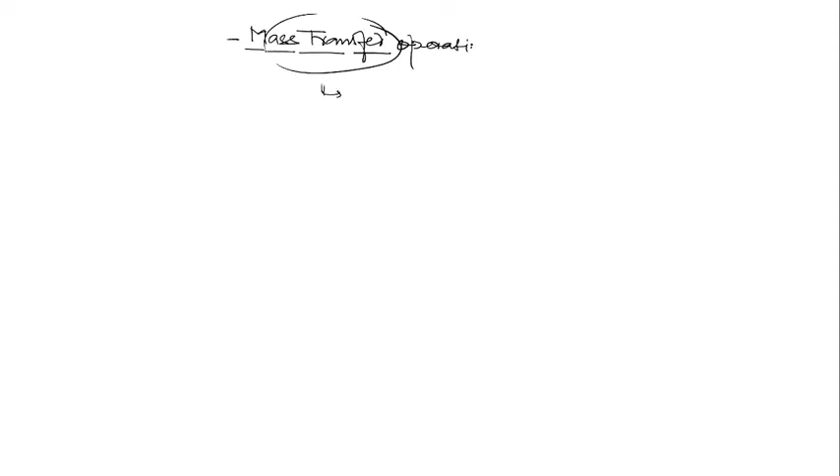Is this clear, Pratisha? So basically mass transfer operation is a unit operation. Mass transfer operation is a unit operation. So again, listen very carefully.

If you are talking about change in composition in a solution or mixture, there are various unit operations in chemical engineering applications which involve change in composition in solution or mixture, which does not involve any chemical reaction. That means without chemical reaction, or in the absence of chemical reaction, there is some mixture or solution which involves the change in composition.

If you are talking about the change in composition in a mixture that is based purely and entirely on mechanical processes, we deal with that in mechanical operations. In mechanical operations, we change the concentration of solution by removing the solute, by removing suspended solids, using mechanical forces like centrifugal forces, gravitational forces, and other forces.

But if we are talking about change in composition, if we are doing any operation on a solution to carry out the change in concentration without chemical reaction, that's called mass transfer operation. Is that very clear?

And what is the importance of this mass transfer operation? What is the need for change in composition of solution? Because there are rarely any chemical processes that do not require a preliminary purification of raw material or final separation of the products from the byproducts, and for these, mass transfer operations are usually used. That means they are very rare — there are very rare chemical processes that do not require preliminary purification of raw material.

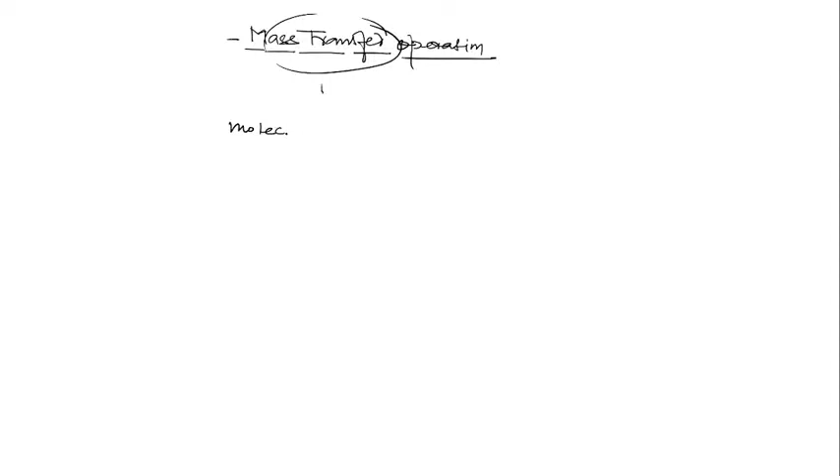Molecular diffusion. Still I have not told you the definition of mass transfer operation. I told you only what mass transfer is, but I have not defined mass transfer operation. Mass transfer operation is any operation which involves the separation of components from a solution without involving any chemical reaction. So through mass transfer operation we can separate the components from solutions. But what mass transfer operation actually is, I have still not defined.

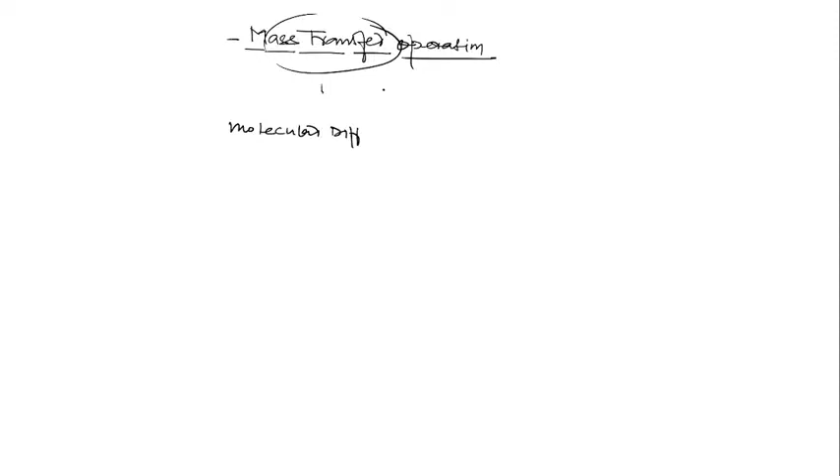So let us see here. As I told you, I also told you what is the importance of mass transfer operation. Now I am going to define molecular diffusion. So what is molecular diffusion first? Molecular diffusion is nothing, it is...

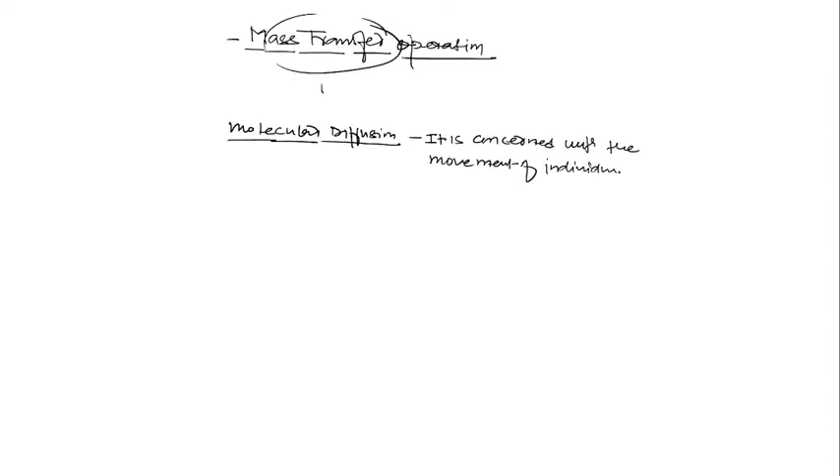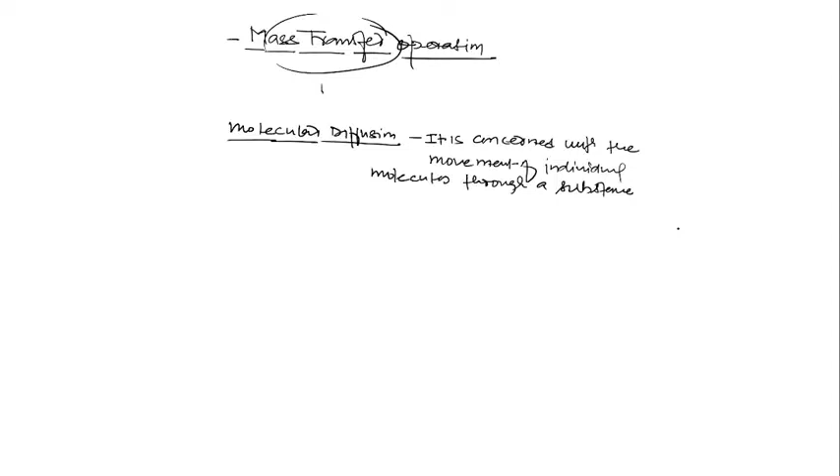...concerned with the movement of individual molecules through a substance, movement of individual molecules through a substance by virtue of their thermal energy. Clear?

And from the kinetic theory of gases we can visualize what occurs in molecular diffusion. You might have heard about Brownian motion in chemistry. The same phenomena we can also explain with the concept of kinetic theory. The kinetic theory of gases provides a method of visualizing what occurs in diffusion. Through kinetic theory, a molecule is imagined. Just think of your room, the air is there, and there are molecules of oxygen and nitrogen.

From kinetic theory you can imagine that the molecules of the species travel in a straight line with a uniform velocity until it collides with another molecule. Once it collides with another molecule, its velocity changes both in magnitude and direction.

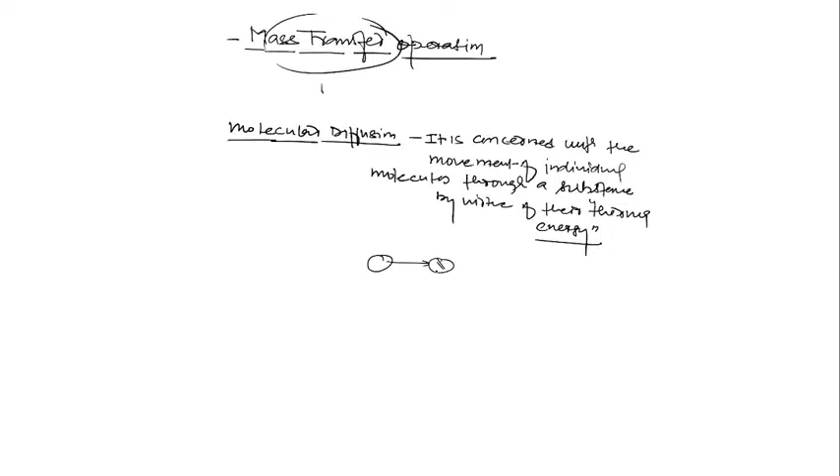So the molecules travel a highly zigzag path, because once a molecule moves in a straight line, it will collide with other molecules, and once it collides, it changes its velocity, both the vector quantity changes. So the velocity changes in both magnitude and direction. They may change direction. Let's say this is a single molecule I'm talking about — it changes the magnitude of velocity and also direction. Again it travels, again it collides with another molecule, and again its magnitude and direction change, and so on.

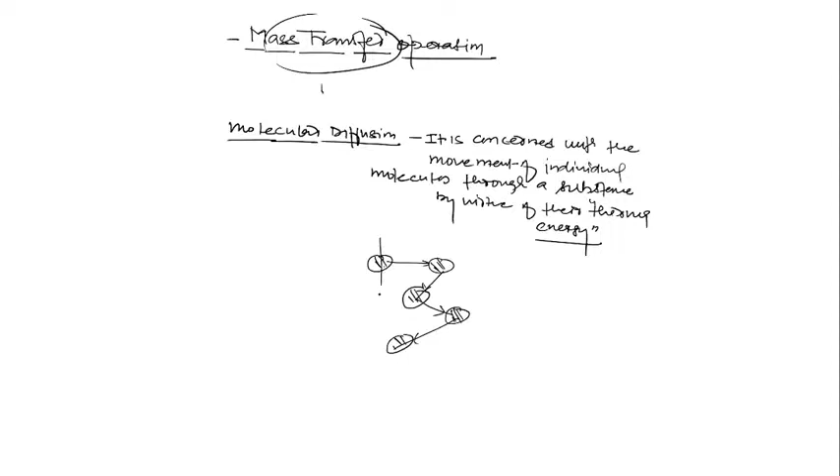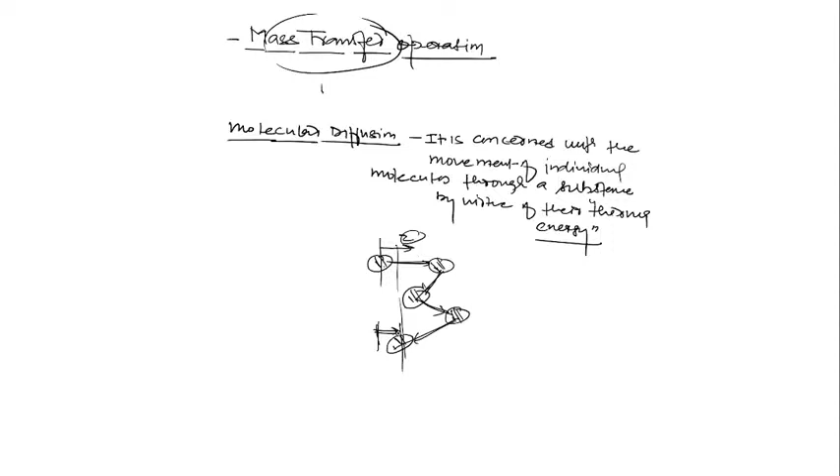So what happens here? There is a highly zigzag path — the molecules travel a highly zigzag path, but the net distance in one direction is very small. If I'm talking about movement in the z direction, the net movement of these particles in the z direction is a very small fraction of the actual movement. The particles actually move through many segments, but the net movement in any given direction is only this much distance, because molecules ultimately move from this point to this point. So this is the only net movement there is.

So the net movement or net distance in any one direction which it moves in a given time, that's called the rate of diffusion. What is rate of diffusion? Rate of diffusion is simply the distance traveled by the molecules in a given time — that's called the rate.

So rate of diffusion is only a small fraction, or you can say the net distance traveled by the molecule in a given direction is a small fraction of the length of its actual path, and for this reason the diffusion rate is very slow, or molecular diffusion is a very slow process.

Although we can expect to increase the rate of molecular diffusion by increasing the temperature and decreasing the pressure. Increasing temperature will increase the kinetic energy of molecules, and decreasing the pressure will increase the mean free path. As mean free path increases, and pressure decreases, the number of collisions will decrease.

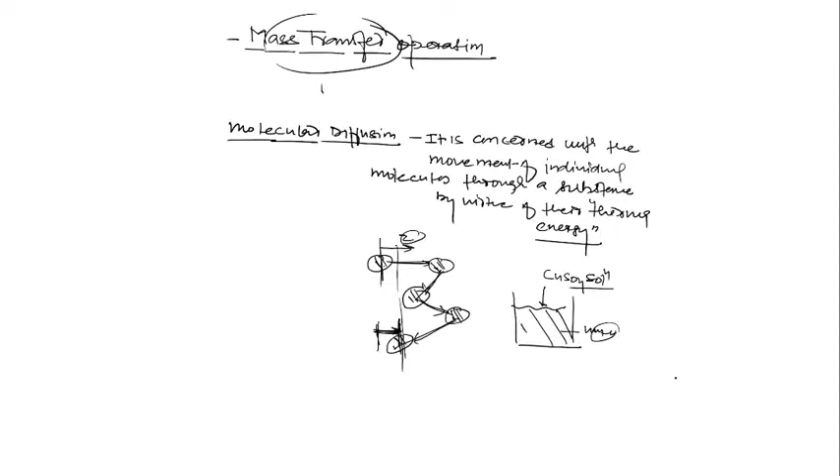By kinetic theory of gases, a molecule is imagined to travel in a straight line at uniform velocity until it collides with another molecule, whereupon its velocity changes both in magnitude and direction.

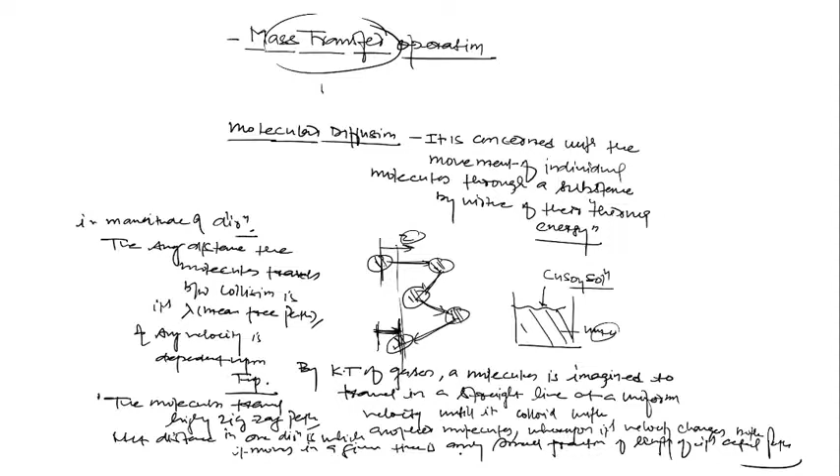So why is it slow? Because the molecule is imagined to travel in a straight line, it collides with other molecules, and upon collision it changes its magnitude and direction, following a highly zigzag path. That's why the net movement in a given direction is only a small fraction of its actual movement, and that's why molecular diffusion is a very slow process.

Next point, although we can expect it to increase with decreasing pressure and increasing temperature, I haven't told you anything about mass transfer yet. I just told you about diffusion. Diffusion is simply the transport of species by virtue of its thermal energy.

It is concerned with the movement of individual molecules through a substance by virtue of thermal energy. That's called molecular diffusion. And since molecular diffusion is a slow process, any mass transfer associated with molecular diffusion will also be a very slow process. Today I will discuss only molecular diffusion, and how it relates to mass transfer I will discuss in the upcoming section.

But how can you increase molecular diffusion? By increasing temperature and lowering the pressure. Increasing temperature will increase the molecular velocity and also kinetic energy.

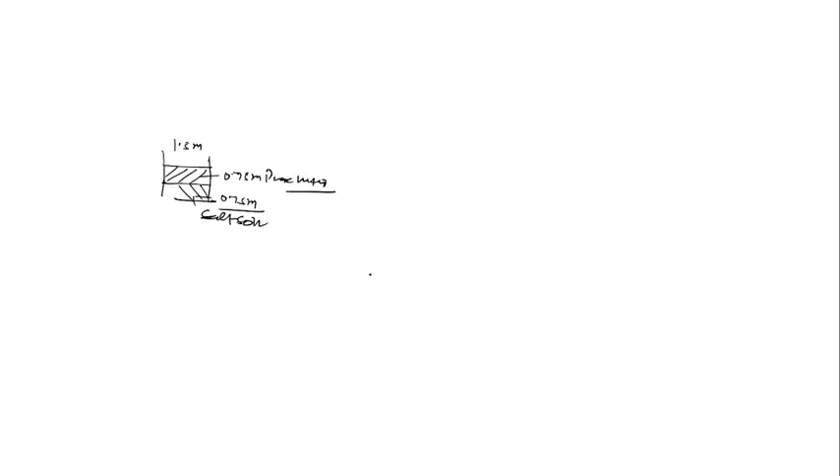So one half means what? Salt will get permeated because of the concentration, as in a natural process, since molecules are moving randomly, and that's called diffusion. So due to molecular diffusion, the molecules of water and molecules of salt are going to move here and there, and if the contents of the tank are left completely undisturbed, then salt by molecular diffusion will completely permeate the liquid and ultimately come everywhere to one half of its concentration in the original brine.

One half, because whatever concentration was there becomes half, because obviously the volume becomes twice. As the volume becomes twice, the concentration becomes half. Yes or no?

Because whatever salt is there, let's say 0.75 meter depth and some area, it means some volume is there, and an equal volume of water we have placed over this pure salt solution gently without any disturbance. Then obviously, due to molecular diffusion, or due to transport of molecules called molecular diffusion, the concentration of the salt becomes half of its original solution.

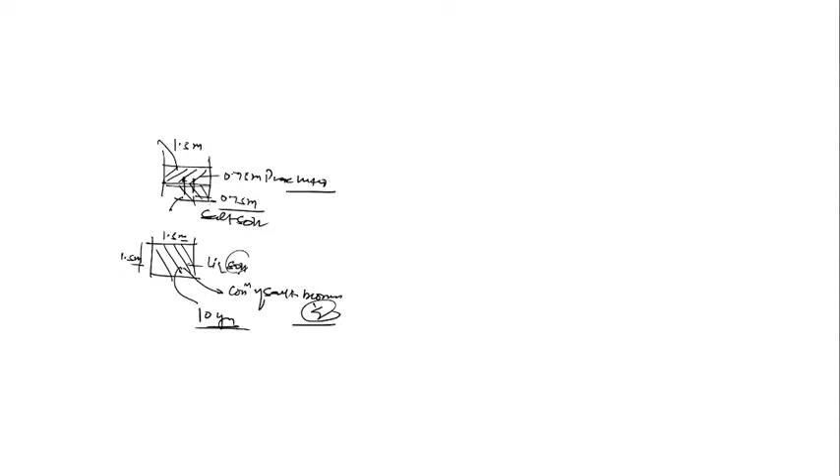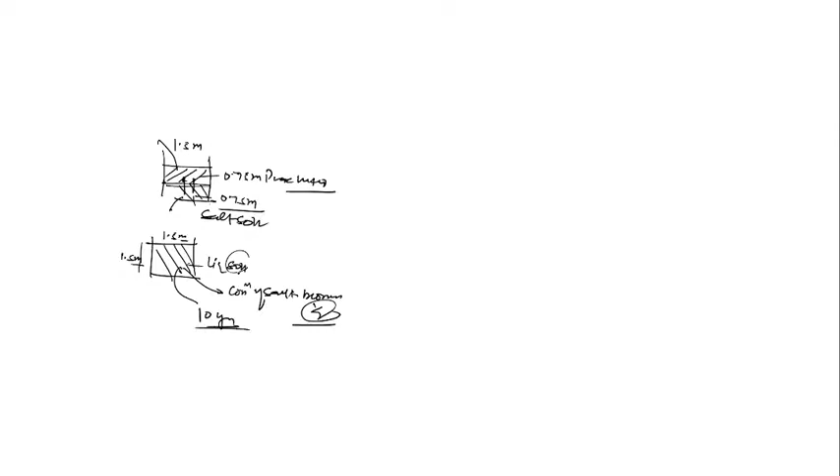Clear? So two types of mass transfer we have seen. What is mass transfer? When diffusion of species takes place from the region of higher concentration to lower concentration, that's called mass transfer. Clear? So first I told you molecular diffusion, and based on molecular diffusion, two types of mass transfer exist. One is called molecular mass transfer, other is called convective mass transfer.

So first of all listen to what I told you. One is molecular diffusion, and other is eddy or turbulent diffusion. Molecular diffusion is concerned with the movement of individual molecules through a substance by virtue of its thermal energy.

And if this random motion, this molecular diffusion, is taking place in the presence of a concentration gradient, that's called mass transfer. Is this clear? In simple terms, when the random motion of molecules takes place in presence of a concentration gradient, that's called molecular mass transfer. Clear? A simple mass transfer is there.

One is called molecular mass transfer, other is called convective mass transfer. Molecular mass transfer is primarily due to molecular diffusion. Convective mass transfer is primarily due to eddy or turbulent diffusion. Clear?

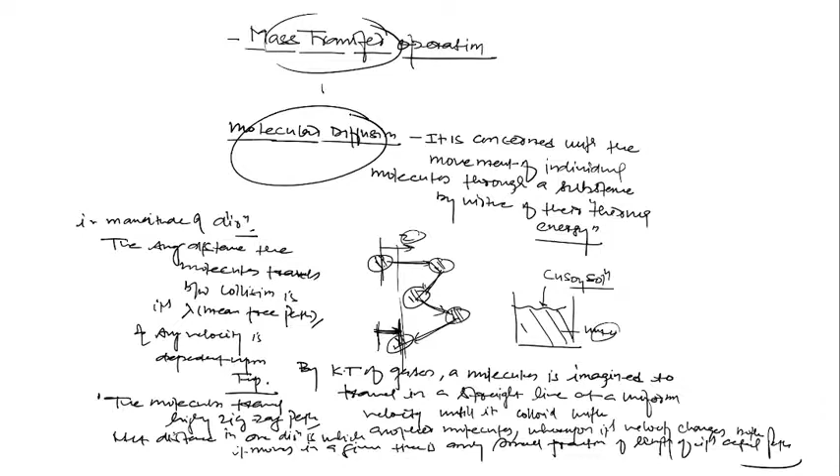So first, I told you it is molecular diffusion. Now what is mass transfer? The mass transfer is the molecular diffusion in presence of concentration gradient, or you can say diffusion, in presence of concentration gradient. It is diffusion.

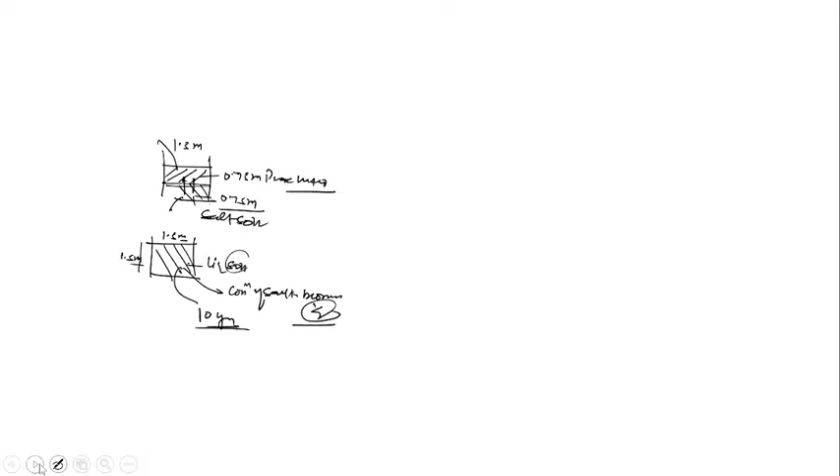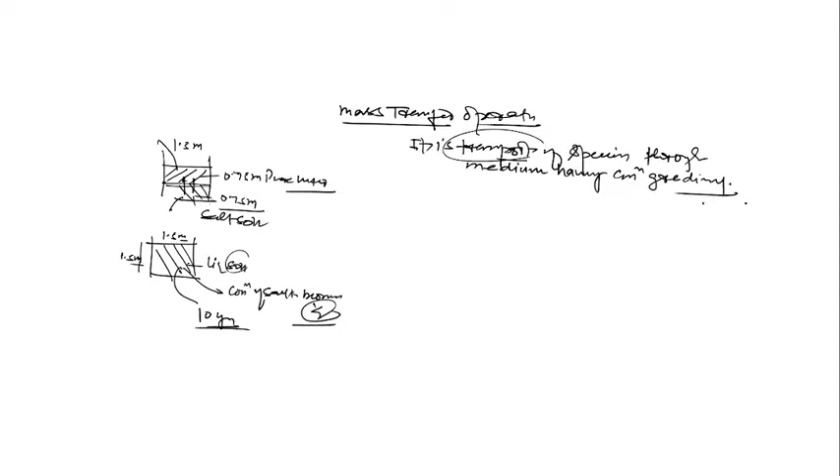Now I am going to define mass transfer operation. It is transport of species or component through a medium having concentration gradient, that is called mass transfer operation. So you can also say diffusion of species. Transport is nothing but diffusion, and diffusion is of two types: one is molecular diffusion, other is eddy diffusion. That's why I told you, commonly, it is transport of a species through a medium having concentration gradient, that's called mass transfer operation.

Types of mass transfer. Depending upon mechanism of transport, there are two types of mass transfer. One is molecular mass transfer, and second is convective mass transfer.

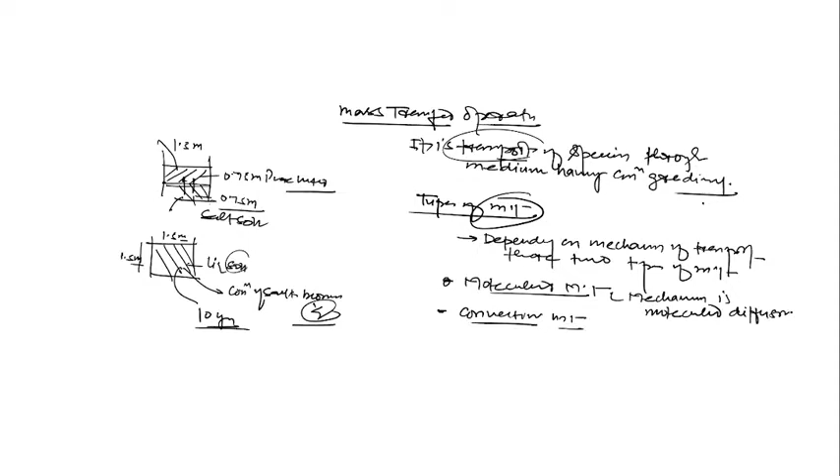In molecular mass transfer, the mechanism is molecular diffusion. You can write about this point: mechanism is molecular diffusion. It prevails in stagnant fluid medium, and also in fluid which are moving only in laminar flow. Clear? This is what molecular mass transfer is.

In convective mass transfer, the mechanism is eddy diffusion or turbulent diffusion. And obviously molecular mass transfer is very slow because its mechanism is molecular diffusion, while convective mass transfer is very fast because its mechanism is eddy transport or turbulent diffusion. Is this clear?

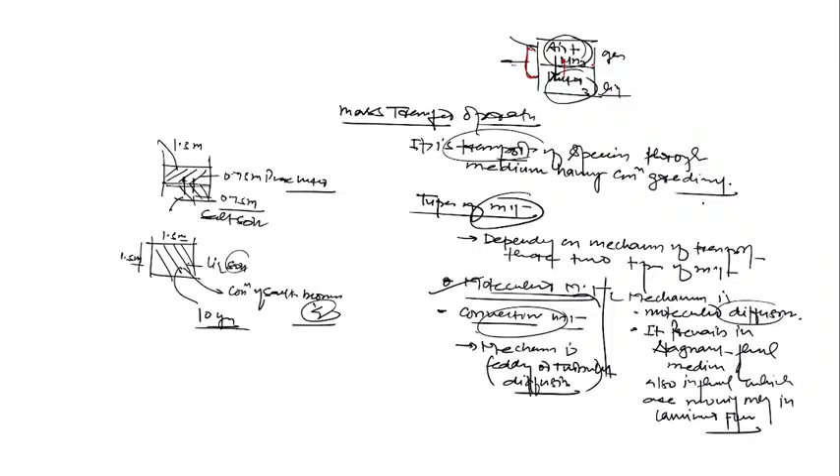At the end of the operation, when the system reaches equilibrium, what happens? Concentration of any constituent, either air or ammonia, is same throughout a phase. Same throughout a phase means it is not equal in all phases, but it is uniform. Whatever concentration of ammonia, it is same throughout the gas phase, and whatever concentration of ammonia in the liquid, that will be uniform throughout the liquid.

So what I'm saying to you: ammonia concentration will be uniform throughout the liquid, and uniform at a different value throughout the gas. Clear? And there is no further change in concentration because the system reached equilibrium.

So let's say I'm here, this is y, this is x. Y is the mole fraction or composition of ammonia in the gas phase. X is the composition of ammonia in the liquid phase. This composition of ammonia in gas and in liquid is not going to be further altered because the system reaches equilibrium, and that's called the equilibrium composition of ammonia in gas and liquid. Why equilibrium? Because they are not going to further change, since this is the composition at the condition of equilibrium.

It means if this composition, let's say y is 0.3 and x is 0.2 - I told you these are not necessarily equal, they are different. It means concentration of ammonia in the gas phase is uniform, concentration of ammonia in the liquid phase is uniform, but they are different in values. Here it's 0.2, here it's 0.3.

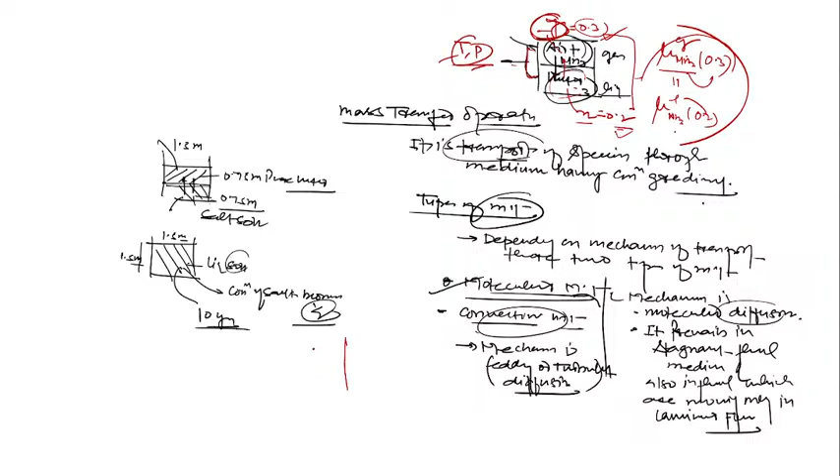At the same time, in a multiple phase system, we customarily deal with the diffusional process in each phase separately. Customary means it's a tradition. So if you're talking about mass transfer between multiple phases, like gas phase to liquid phase, then we are not talking about mass transfer for the whole system. We are talking about mass transfer in the individual gas phase and individual liquid phase. And in the individual gas phase, the driving force is concentration difference.

So if you're talking about mass transfer in multiple phases, then it is customary to define the rate of mass transfer in individual phases, and in individual phases we can write the driving force as a concentration difference because it is easy to visualize.

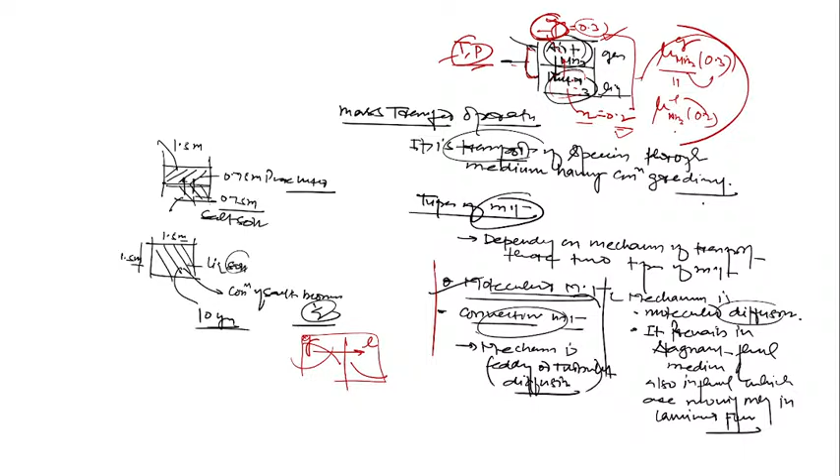So today I told you about two different types of mass transfer. Now as far as driving force is concerned, through this example we can define that in this case, driving force for mass transfer - so through this example, when you allow multiple phases to be in contact...

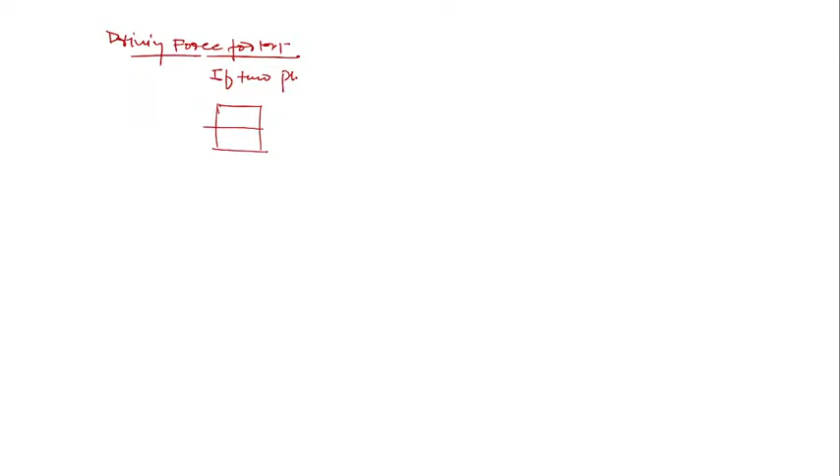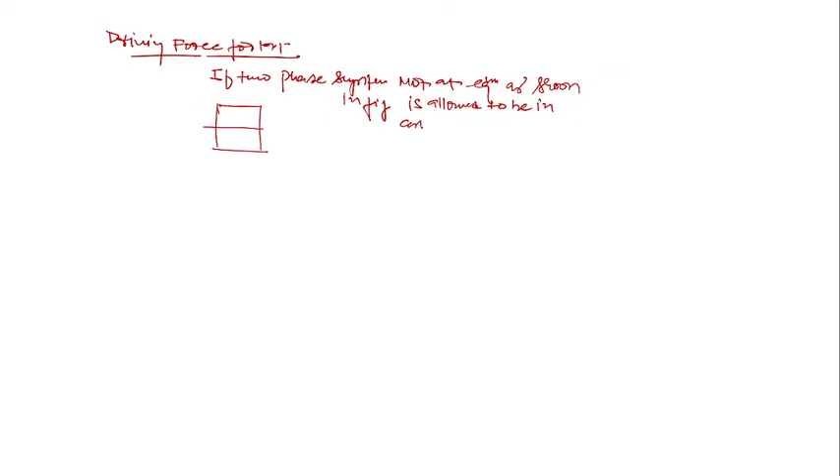If the two-phase system is not at equilibrium, as shown in the figure, when allowed into contact, spontaneous alteration through molecular diffusion occurs, ultimately bringing the system to a state of equilibrium. Initially they were not at equilibrium, but finally they will reach the state of equilibrium, and alteration stops - whatever change is there, that change will no longer be possible.

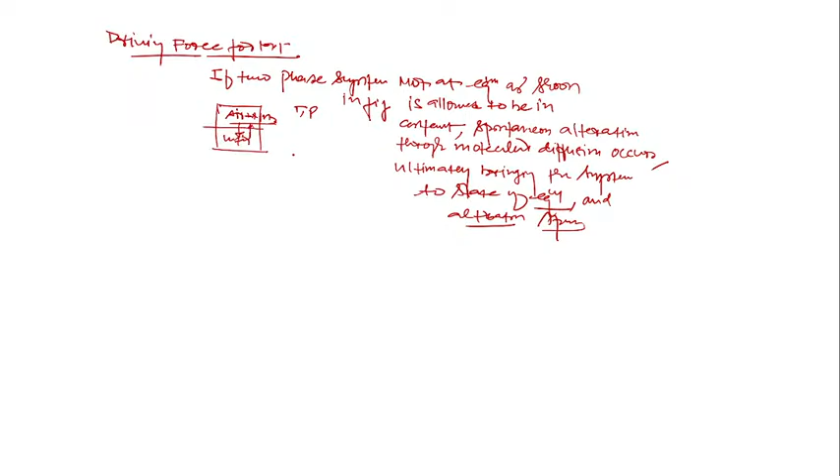So you should write here: water, it's air plus ammonia at a given set temperature and pressure being in contact with the water, then transport occurs due to random motion of molecules, and this transport will continue until the system reaches equilibrium. Once equilibrium is established, then y and x - this y and this x - are the equilibrium compositions.

So at the end of the operation, the concentration of ammonia in the gas phase is uniform, and also uniform in the liquid phase, but at different values. This means y is not equal to x.

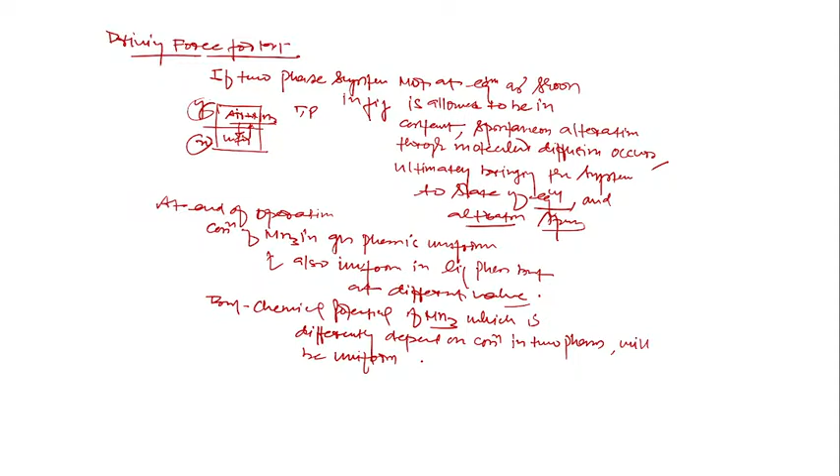But the chemical potential of ammonia, which differently depends on concentration in the two phases, will be uniform everywhere throughout the system. What is uniform is uniform in the liquid phase, uniform in the gas phase, but at different values - however the chemical potential will be uniform throughout the system. It means mu of ammonia in the gas phase is equal to mu of ammonia in the liquid phase, at a given temperature and pressure.

So this uniformity brought the system to equilibrium. Hence uniformity of chemical potential among phases brought the system to equilibrium. Hence, the true driving force for diffusion, for mass transfer, is the chemical potential difference.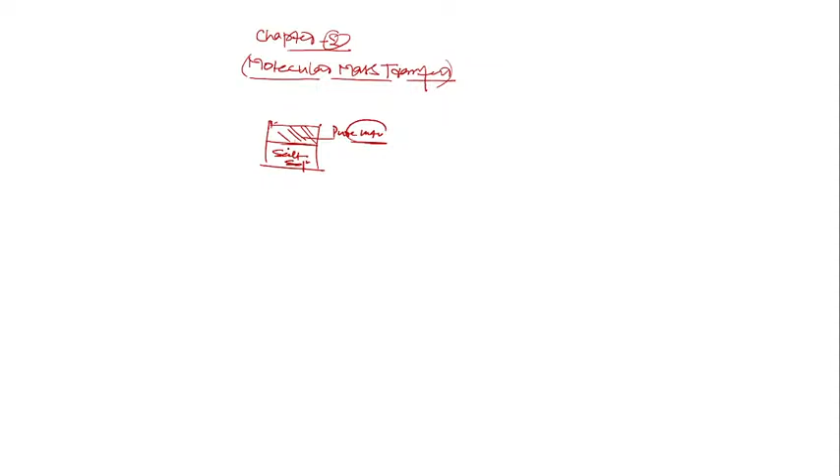Clear? If you have a solution, take one example you can do yourself: take salt solution in a glass of water, add some salt to water, and over this, in part of the glass, place pure water. Then, as there is non-uniformity, molecular diffusion will take place, and this ultimately makes the concentration uniform throughout. After a long time it becomes uniform concentration throughout, and that is only by molecular diffusion, when you have not placed any mechanical stirrer or spoon.

If you're using a spoon, then it's called convective mass transfer. So if we are placing the water over it and holding for sufficient time without any disturbance, then after a long time the solution becomes uniform throughout, and that is only by molecular diffusion, as I already told you.

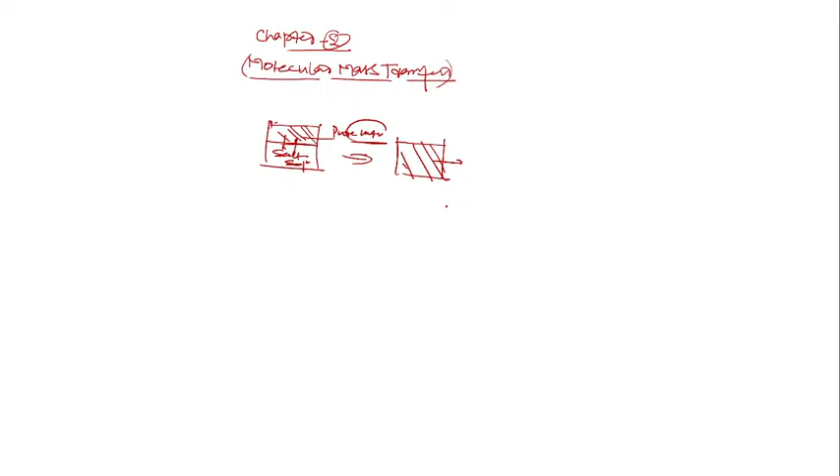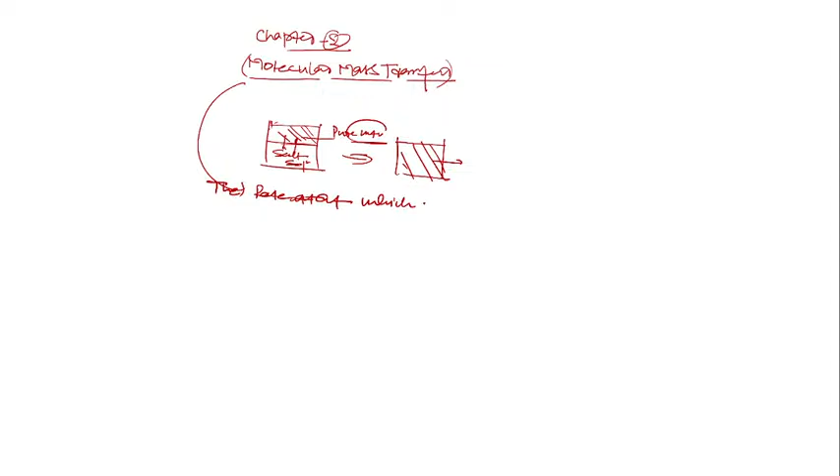The rate at which the solute moves at any point in any direction must therefore depend on the concentration gradient at that point and in that direction. So what I'm talking about is the rate of transport: the rate at which a solute moves at any point, in any direction, depends on the concentration gradient at that point, in that direction. Suppose the solute gets transferred from this point in this direction, then the rate of transport will depend upon the concentration gradient at that point in that direction.

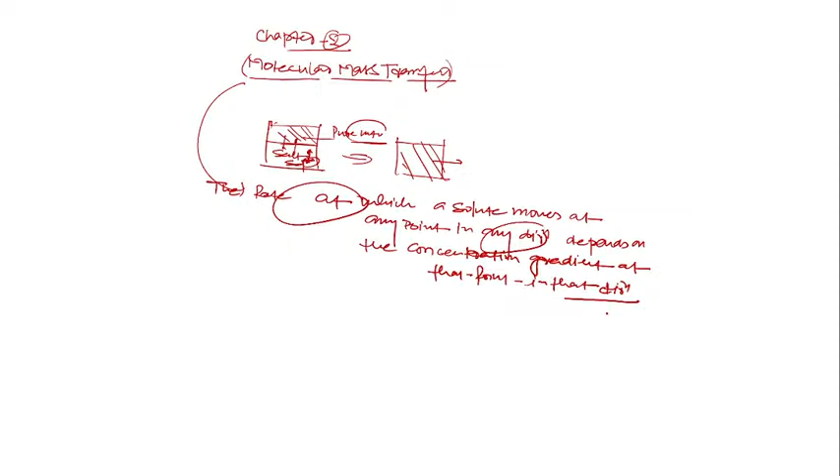So how can we define the rate of mass transfer? The rate of diffusion can be defined as: rate is the amount of solute that gets transported in unit time, through unit area normal to the direction of transport. That's called flux. Clear?

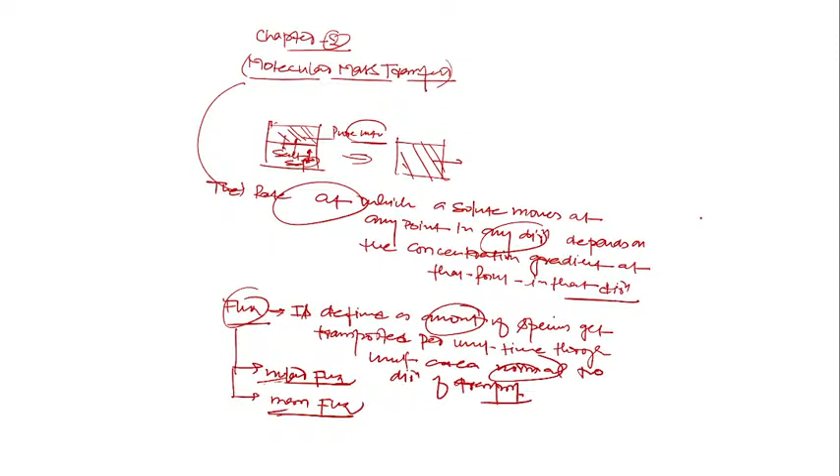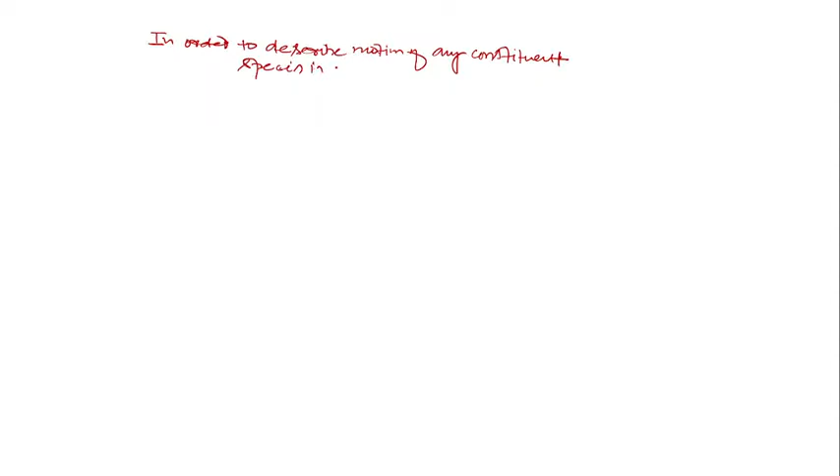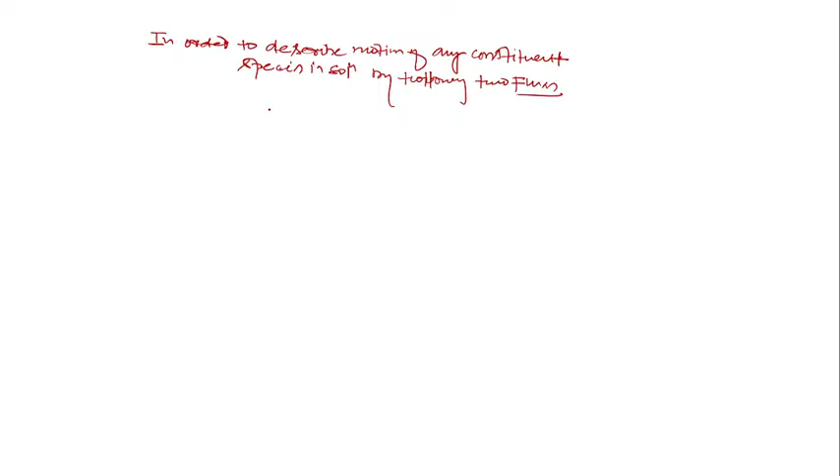In order to describe the motion of any constituent species, any component in solution, we follow two fluxes: one is Ni and the second is Ji, where i stands for any species, any constituent species in solution. So we can describe the motion of any constituent species in solution by these two fluxes, one is Ni and Ji. What is Ni? Ni is the flux of species i

with respect to a fixed location in space. It is the flux of species i with respect to a fixed location in space.

While Ji is the flux of a species with respect to the average molar velocity of all constituents. Flux of species i with respect to average velocity of all species.

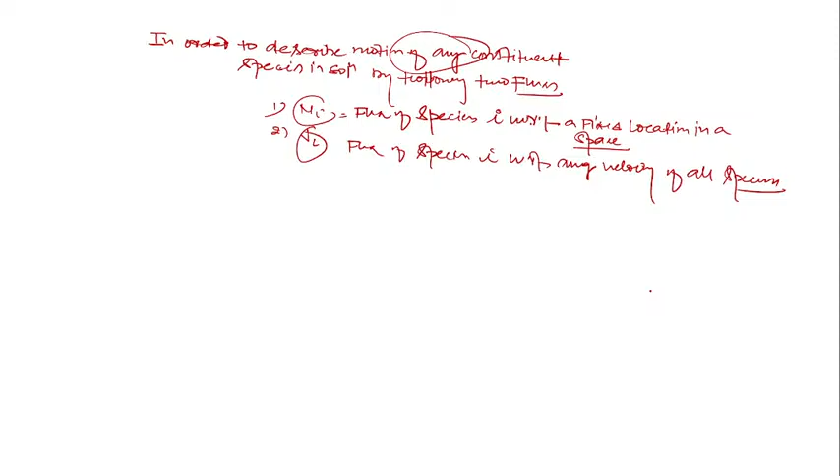So we have seen two types of flux here. What is the difference between these two? Ni is basically the flux of species i with respect to fixed location in space, meaning with respect to a stationary observer. And this is the flux of species i with respect to an observer moving with some average velocity.

So for the same species we can find two types of fluxes, two ways to measure the motion of the species. One is with respect to some fixed coordinate, the other is with respect to some moving coordinate.

This you can easily understand, listen: if a person has put perfume on his body, and he and the observer are either both stationary or moving with the same velocity, in that case the flux of perfume molecules with reference to the observer is due only to concentration difference, or only due to molecular diffusion. Is this clear?

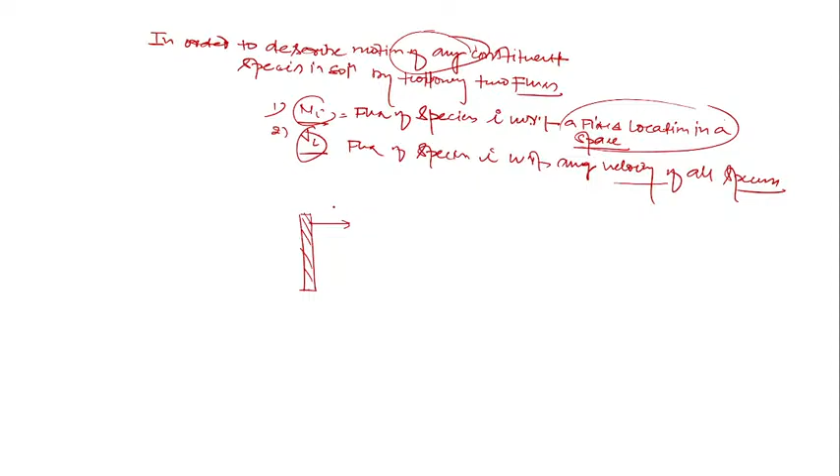Let's say this is the reference plane. This is what I want to show, this is the molecular flux for a stationary observer. For a stationary observer, the molecular flux for a stationary observer, the molecular flux is what, J?

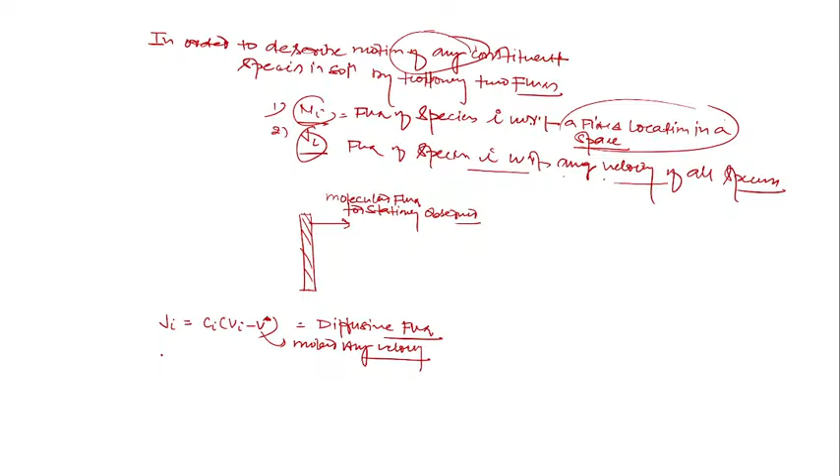Ni equal to Ci into Vi, and this is called total molar flux, which is the sum of diffusive flux, because this is the flux with respect to a stationary observer. So that is because of diffusive flux plus bulk flux. Clear? Or convective flux you can say also.

Or better, you can write advective flux, meaning bulk motion of molecules. Clear? This is the Ni and Ji. This is called diffusive flux, and V star is called the molar average velocity, defined here. So this Ji is called diffusive flux only. Ni is diffusive flux plus bulk flow flux.

When molar average velocity is 0, meaning when the observer is stationary, in that case the diffusive flux is there only.

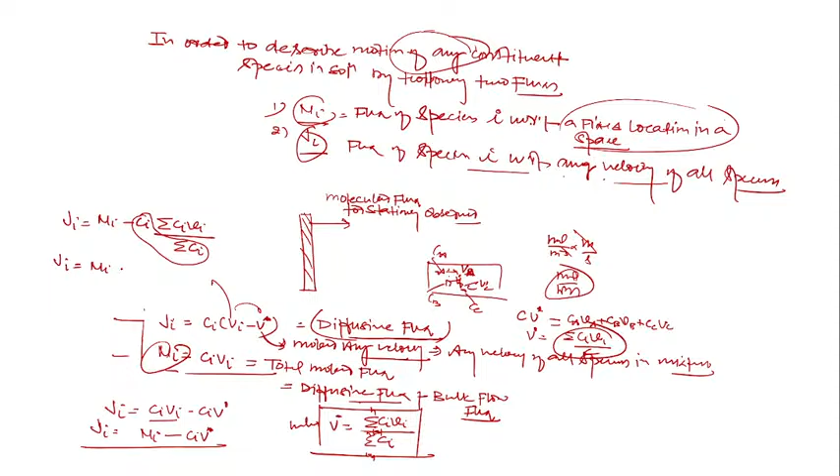And Ci upon total concentration is nothing, it's a mole fraction. So I can find Ji is equal to Ni minus Xi into summation of Ci into Vi.

Ji is equal to Ni minus Xi. Ci into Vi from this equation is nothing, it's Ni. So it's summation of Ni.

So ultimately you can write this equation as Ni is the total molar flux. Why total? Because it's a contribution. Total molar flux is the contribution of two fluxes, diffusive plus bulk flow. So this you can see here, it's Ji plus Xi into summation of Ni. That's the final result.

This is what is called the diffusive flux contribution or molecular flux contribution, and this is the bulk flow contribution.

Is this clear? Yes or no? Clear? So that's all.